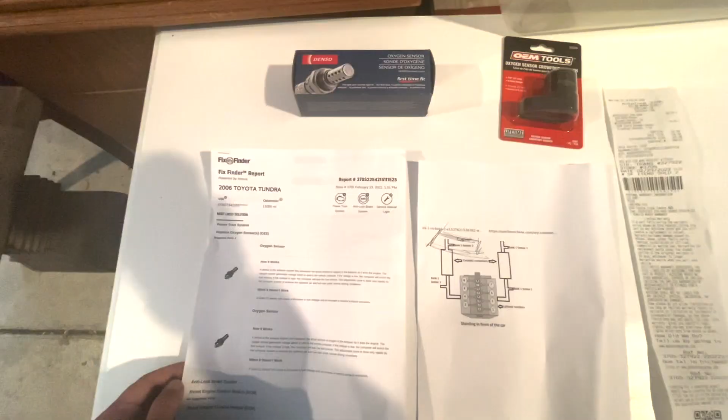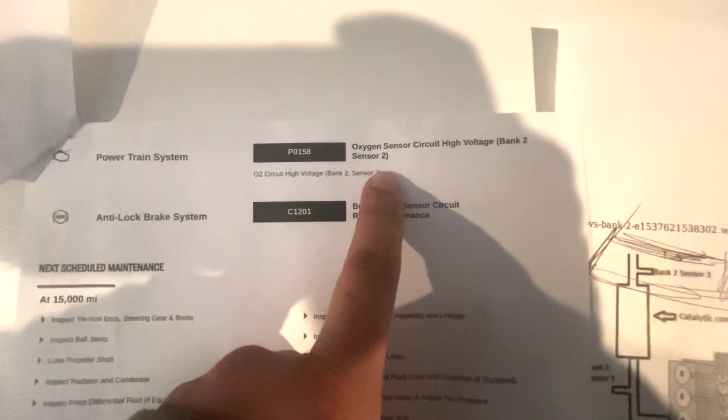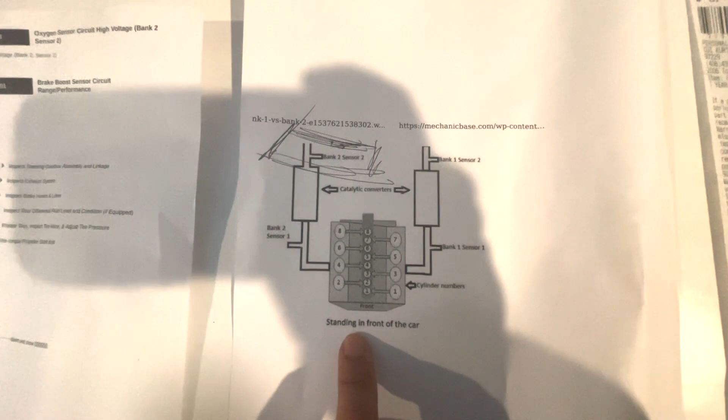Hello, my car engine light turned on, and the OBD report finds that there's an error code P0158, oxygen sensor circuit high voltage on bank 2 sensor number 2. And according to the diagram for the 2006 Toyota Tundra, the bank 2 is located behind the catalytic converter on the left side. See, here it says bank 2 sensor number 2. So this is a sensor I will need to replace.

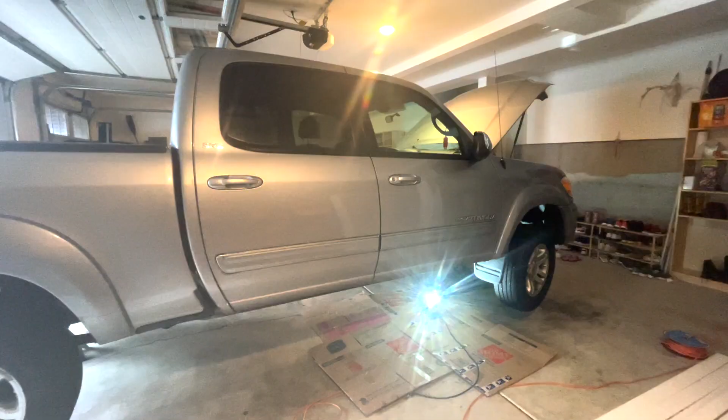I purchased the oxygen sensor from AutoZone. This is how it looks. I also need a special oxygen sensor wrench. The O2 sensor on bank 2, sensor number 2, is located directly behind the passenger front wheel.

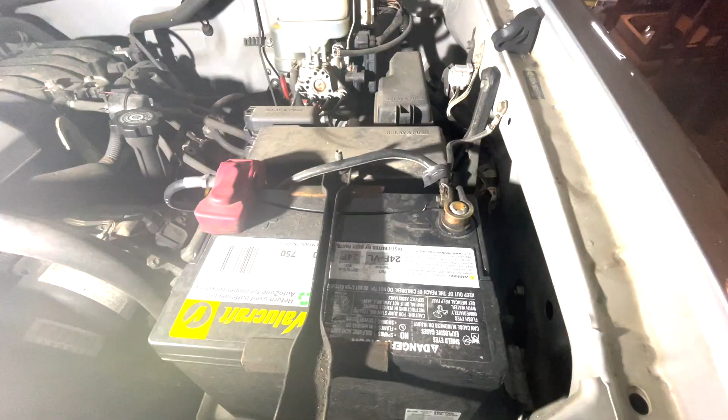And here you find the catalytic converter. And on this side, you can see there's a wire and something plugged into the catalytic converter. This is the oxygen sensor number 2 on bank number 2. To get started, first I'm gonna disconnect the negative terminal of the battery. This will prevent any electrical hazard in case there's a short circuit.

To disconnect the oxygen sensor, we have to push on this little tab here and then pull. Okay, now this is off. Now we're going to put the wrench on the O2 sensor and twist it off. What is special about this socket is it has a cutout section and you can slide the wire through it. And I'm using a 1/2 inch drive to connect it on the other end.

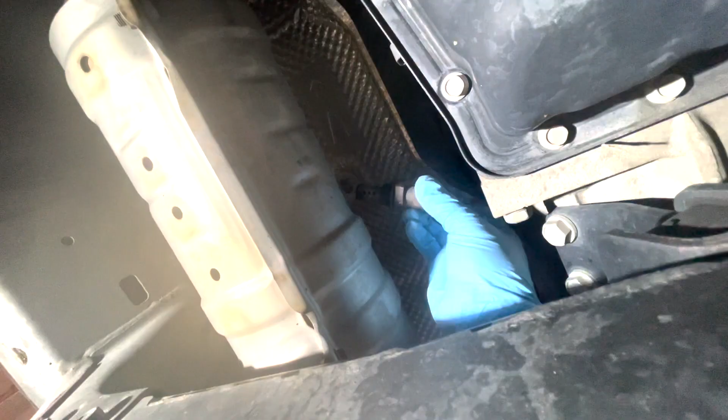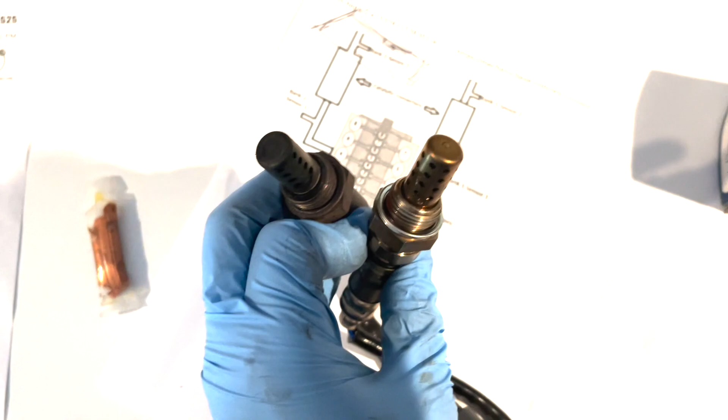So now I can turn it just like that. It's not seized, luckily. It's not too much effort to undo this. This is how the old oxygen sensor compares with the new oxygen sensor. You can see the color distinction. One is completely black, looks all rusted and burned up, and the other one is copper looking.

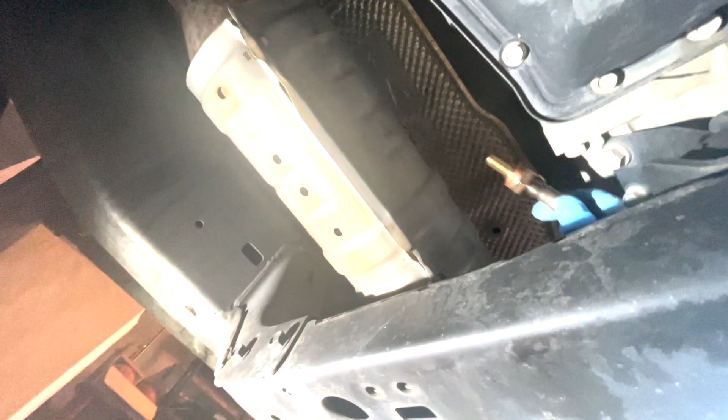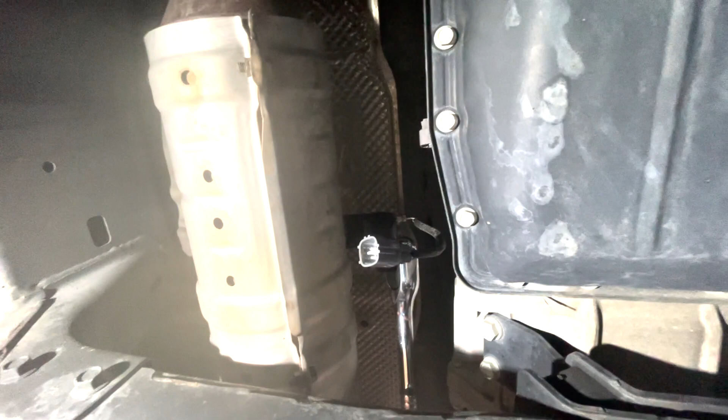Now placing the new sensor into the catalytic converter. Plug in the connector. Hear that click? All right, that's all there is to it.

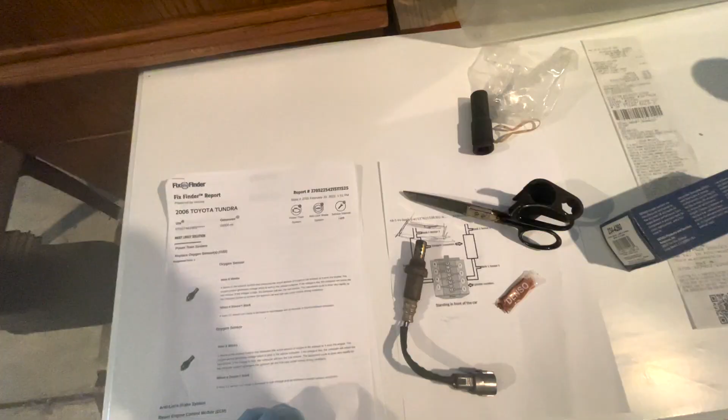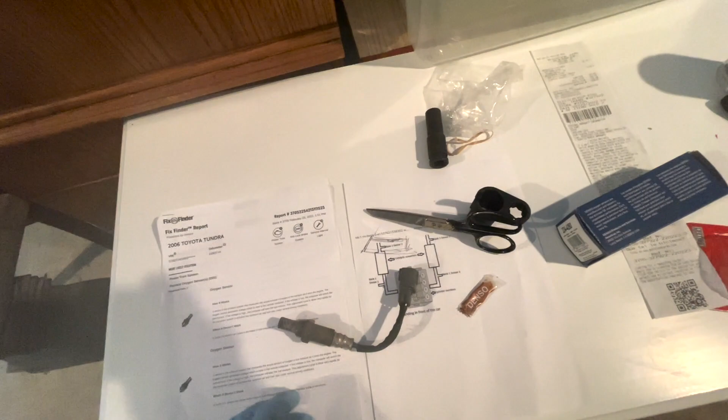The dealership in California wanted an inspection done for $250 and just give you a report of what the problem is without any fixing, labor, and part replacement. So I was able to go to AutoZone and have them read the error code and find the replacement part based on the error code and purchase it for half the price, only $93. And then $14.99 for the special socket.

Okay, I have taken the car out for a 15-minute test drive, and so far the check engine light remains off. I also went to AutoZone and had them reread the error code, and the oxygen sensor error is no longer coming back. So everything's now fixed.